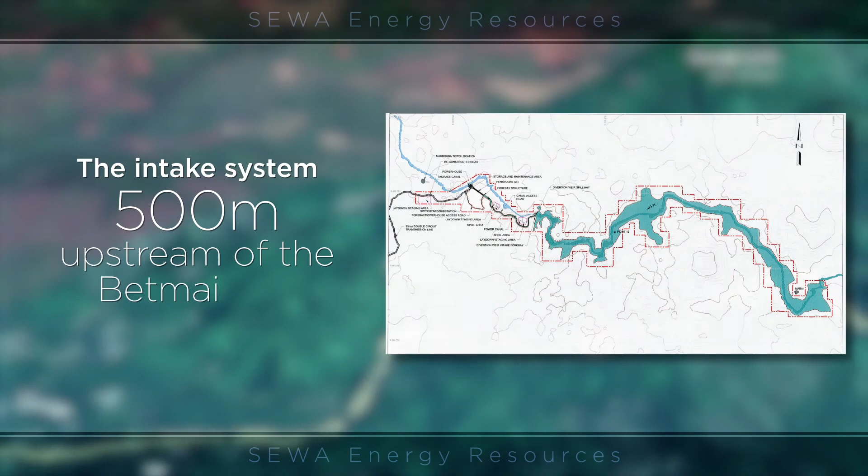The Betmai project is a 27-megawatt run-of-river hydropower facility located on the Pampana River, approximately 40 kilometers east-southeast of the city of Makeni and 12 kilometers north of the town of Magburaka in the northern province. The intake system is located approximately 500 meters upstream of the Betmai Falls and is approximately 77 meters above the powerhouse. The intake system is designed using international best practices to maximize efficiency and minimize the overall footprint and upstream inundated area, which has environmental, social, and construction benefits.

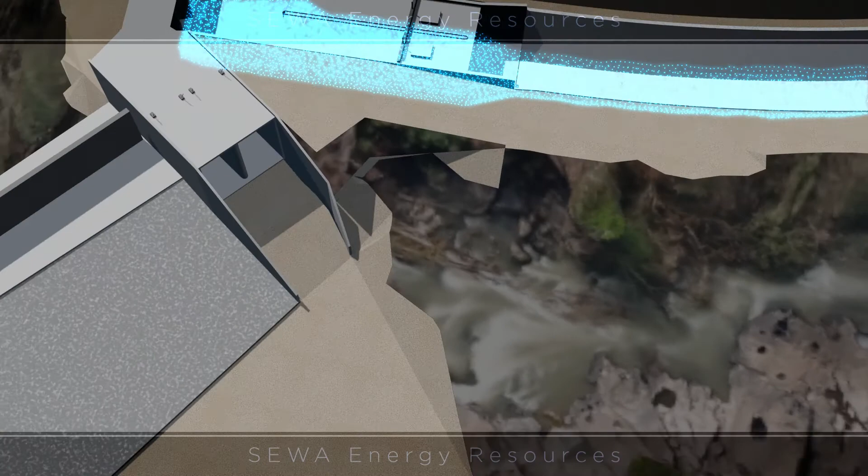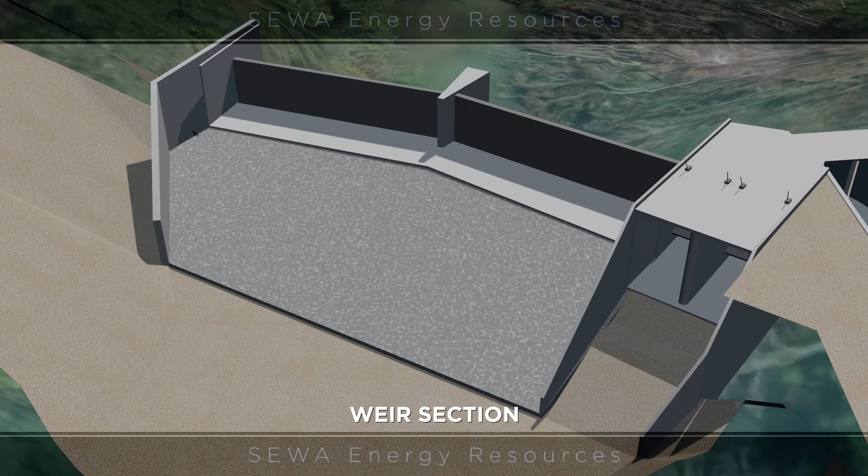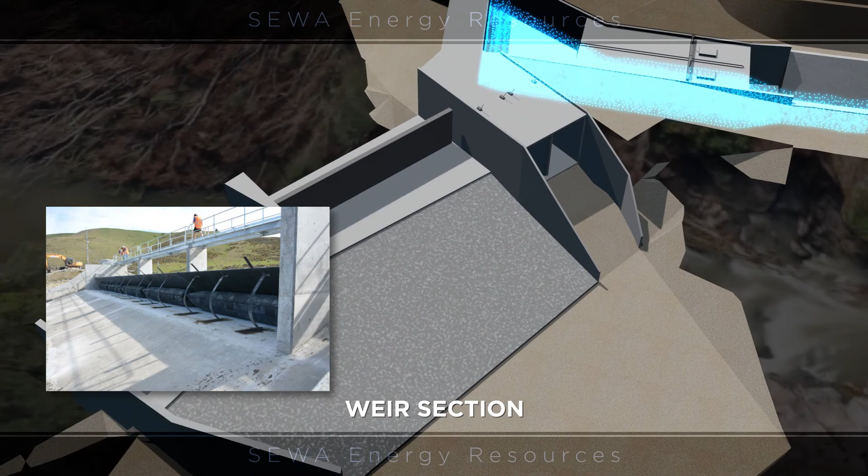This includes a non-overflow section adjacent to the right abutment to contain the head pond, an 8-meter-long and 4-meter-high metal-clad inflatable rubber weir section to manage and control various flood return events up to the 1,000-year return event. During flooding, the gates will automatically be lowered to pass the excess flows downstream. In a lowered position, the gates will be in a horizontal position.

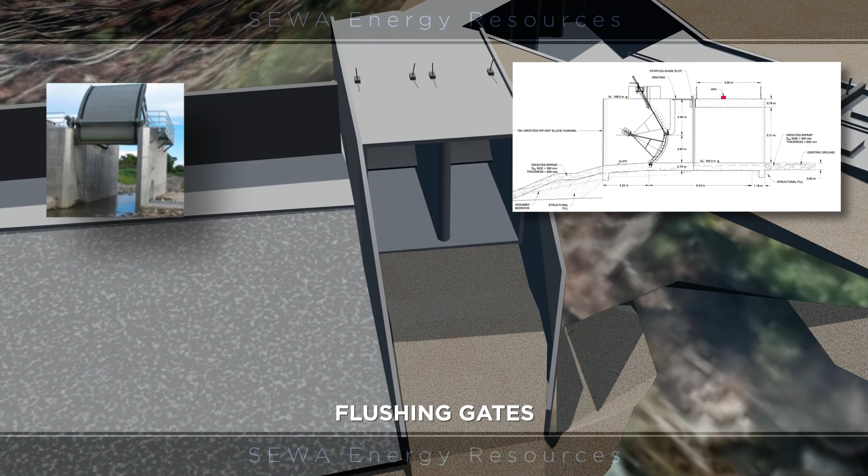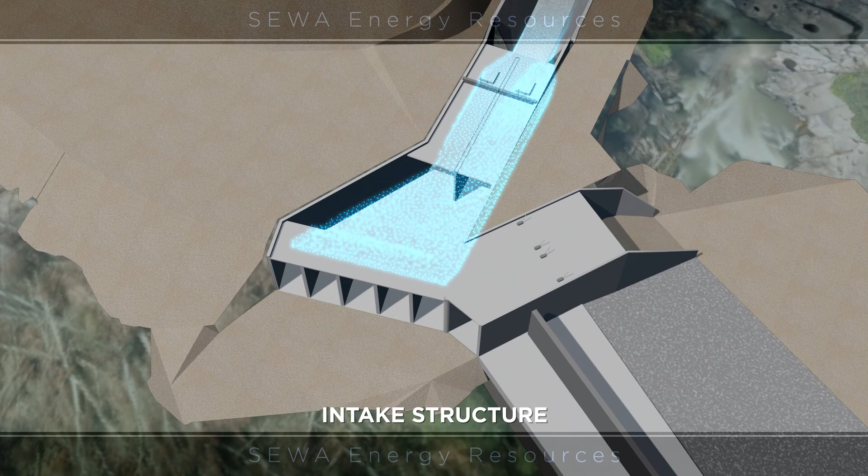Two identical flushing gates located on the left-hand side of the inflatable weir flush built-up sediments in front of the weir and intake structure respectively. An intake structure is located on the left-hand abutment to divert up to 40 cubic meters of water into the power canal. The intake forebay includes an elevated intake section, which is fronted by a grouted riprap apron, coarse trash rack, and scour channel to mitigate the intake of sediments and debris.

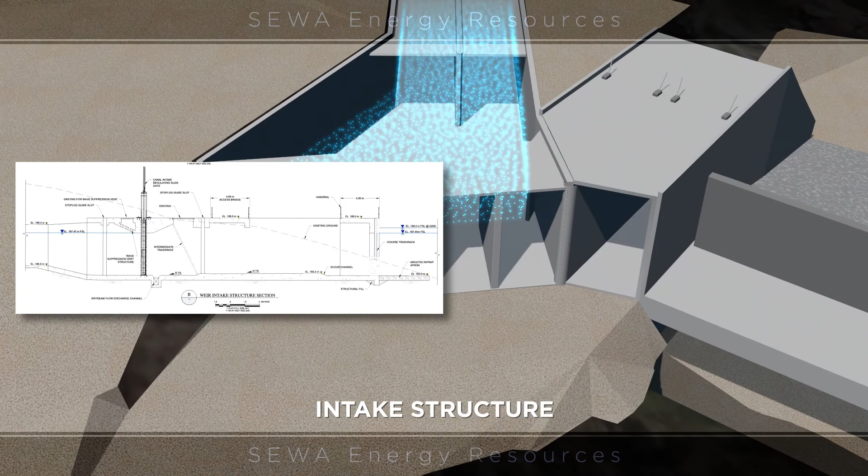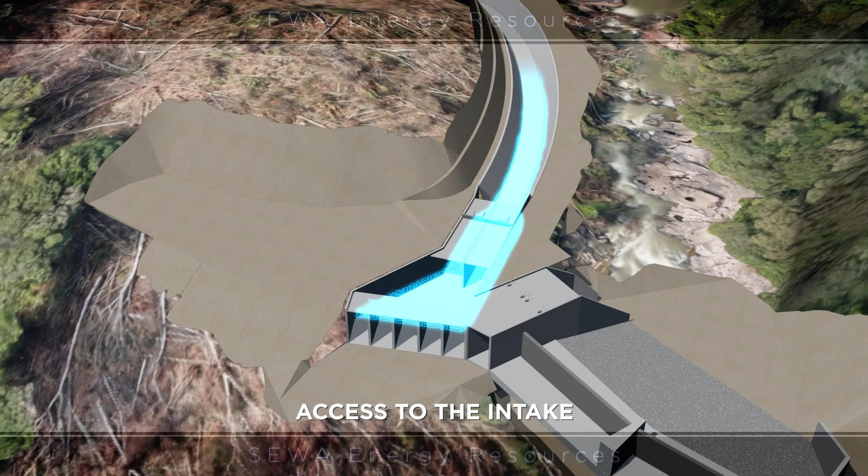The intake forebay splits into two bays, each with a secondary fine trash rack for additional protection, a control gate to throttle flows, and a set of stop logs for maintenance. Access to the intake is adjacent to the power canal on the left bank and terminates in a parking, storage, and laydown area located on the left-hand side of the intake.

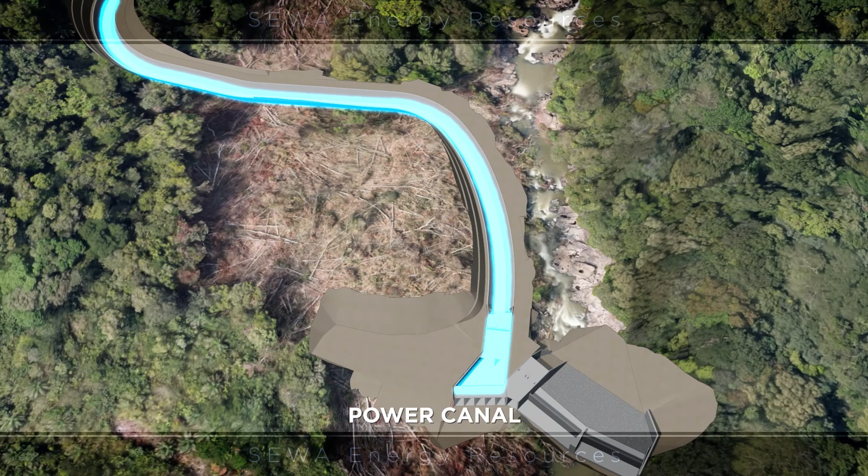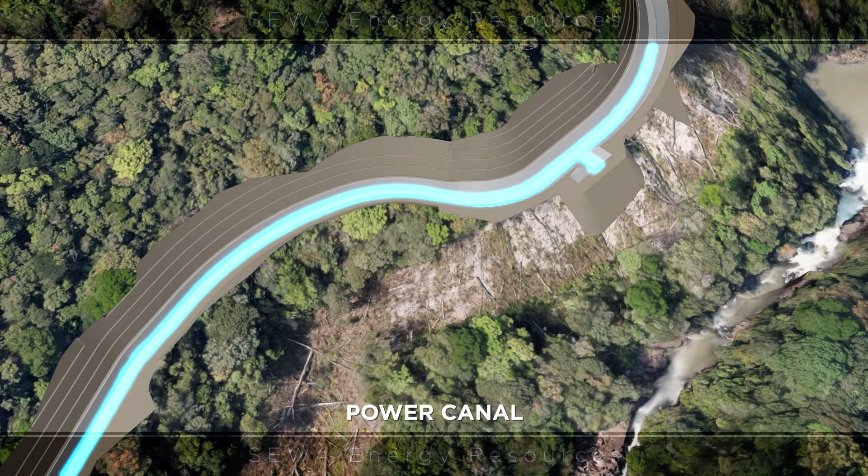A 1,237-meter-long trapezoidal power canal will convey up to 40 cubic meters per second from the intake to the forebay following the natural terrain. The canal bottom will be cut in rock to mitigate settlement and cracking, and the side slope angles varied depending on the soil and rock conditions to promote stability and overall safety. The canal has been designed to contain the full flow with excess water discharging back into the head pond, thereby removing the need for a canal side slope spillway and minimizing the overall footprint and environmental and social impact.

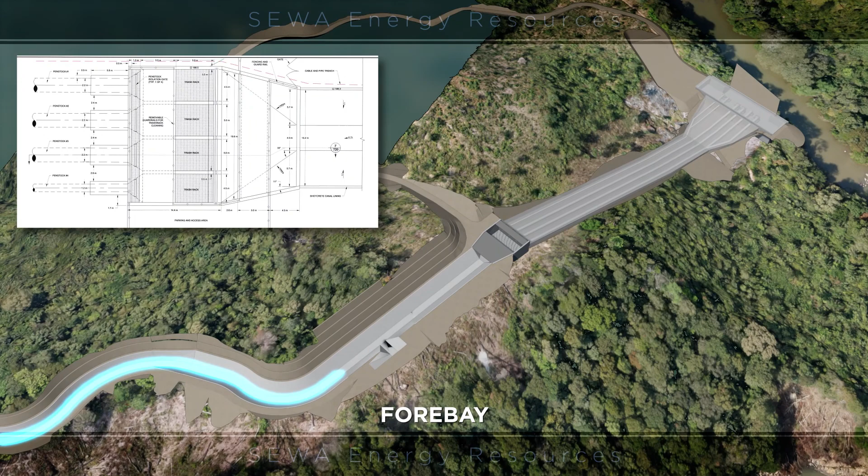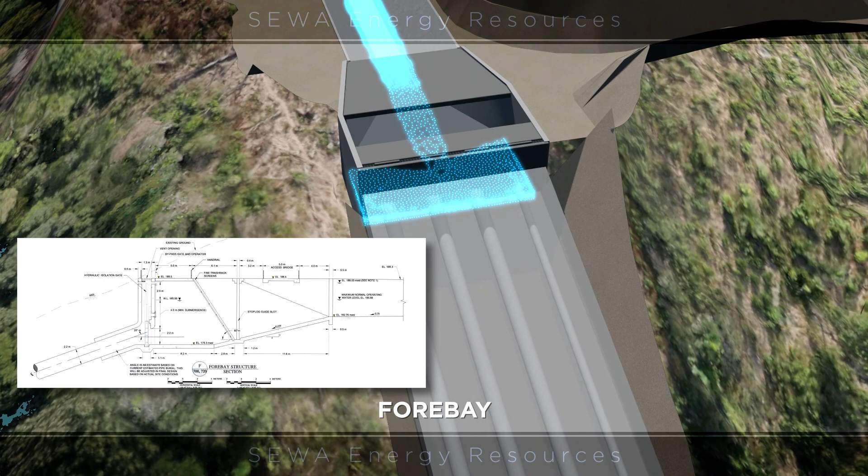Additionally, and as part of the environmental mitigation plan, two game exits have been incorporated along the canal alignment. The power canal terminates into a forebay designed to slow and steady the flow and provide adequate submergence before transitioning the canal flow into the four pressurized penstocks. The forebay splits into four bays, one for each penstock, and includes trash racks, stop logs for maintenance, isolation gates to isolate each penstock, and a small sluice gate and discharge pipe to dispose of sediments that accumulate in a sunken trench.

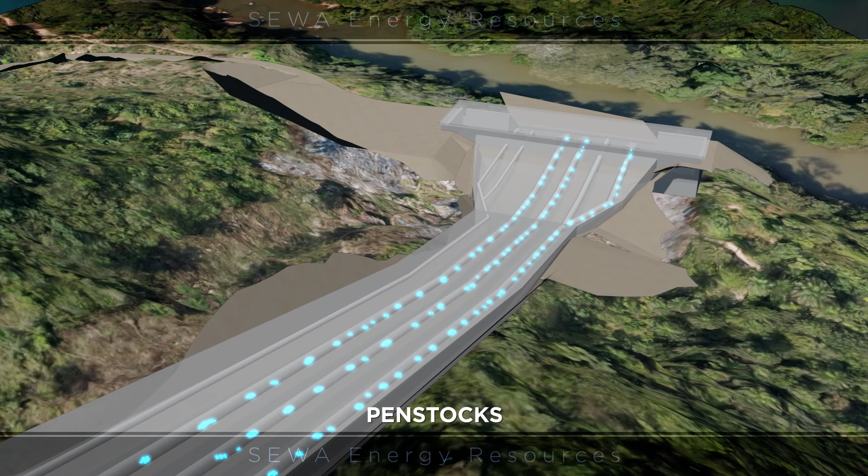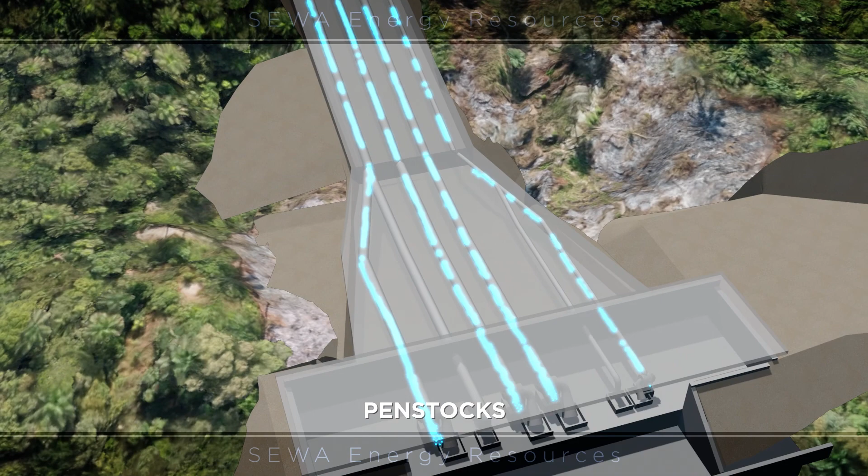There are three 2.3-meter diameter welded steel penstocks, each capable of discharging 12 cubic meters to the larger 8.1 megawatt turbines, and one smaller 1.3-meter diameter HDPE steel penstock capable of discharging 4 cubic meters to a smaller 2.7 megawatt turbine. All four penstocks convey water from the forebay to the turbines over a net height of 76 meters over a total length of 240 meters. The penstocks will be buried to minimize the impact to the environment and take advantage of the soil restraining properties and thermal protection.

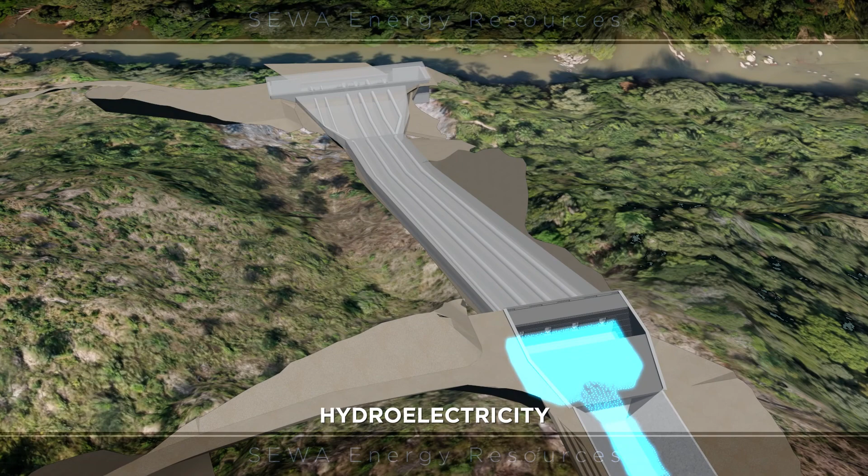Hydroelectricity will be generated by capturing the kinetic energy in the four pressurized penstocks by pushing on blades, causing the turbine to turn and create mechanical energy. Generators connected to the turbines will convert the mechanical energy into electrical energy, which will then be conducted through transmission lines to distribute electricity to homes, businesses, schools, and hospitals.

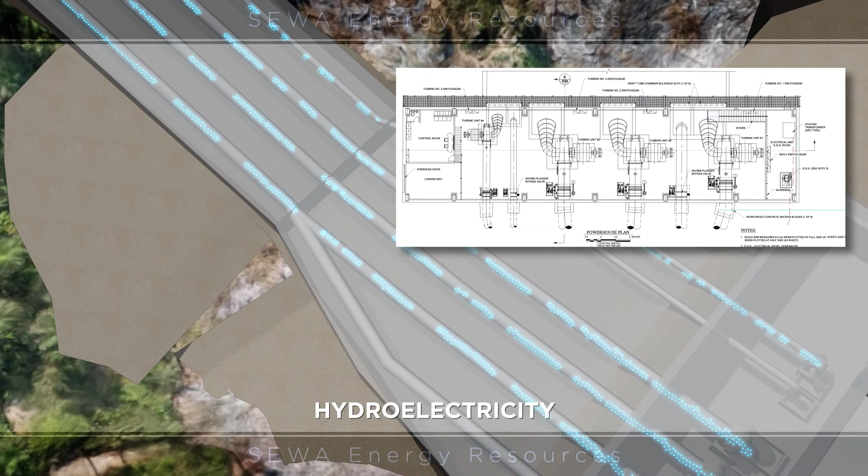Three 8.1 megawatt and one 2.7 megawatt Francis-type turbines have been selected to generate electricity for the Betmai project. Each turbine will include an inlet valve to isolate the turbine when needed. Flows passing through the turbine are discharged back into the Pampana River, completing the run of the river cycle.

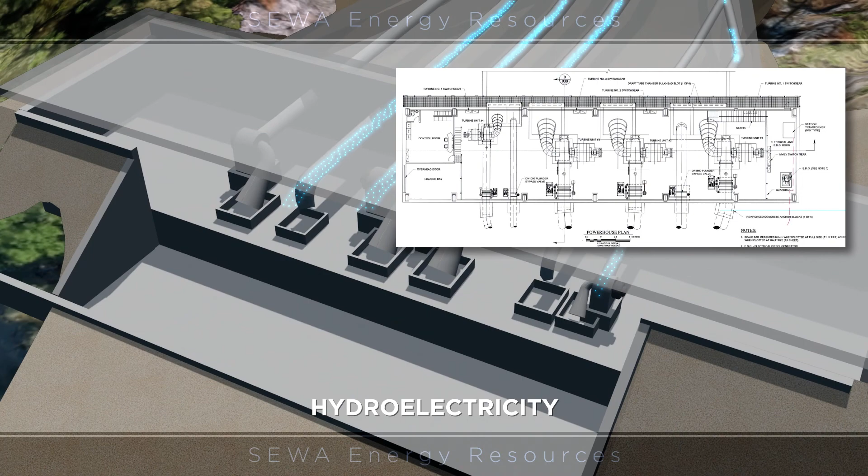The Betmai project will have a significant and positive impact on the economic growth and sustainability of Sierra Leone. The project will provide hundreds of employment opportunities to locals during the construction and operational periods of the project. SEWA signed the power purchase agreement in 2017 and has secured the environmental and water licenses and land rights for the project area. The project is ready for development and is expected to take 2 years to construct and commission.